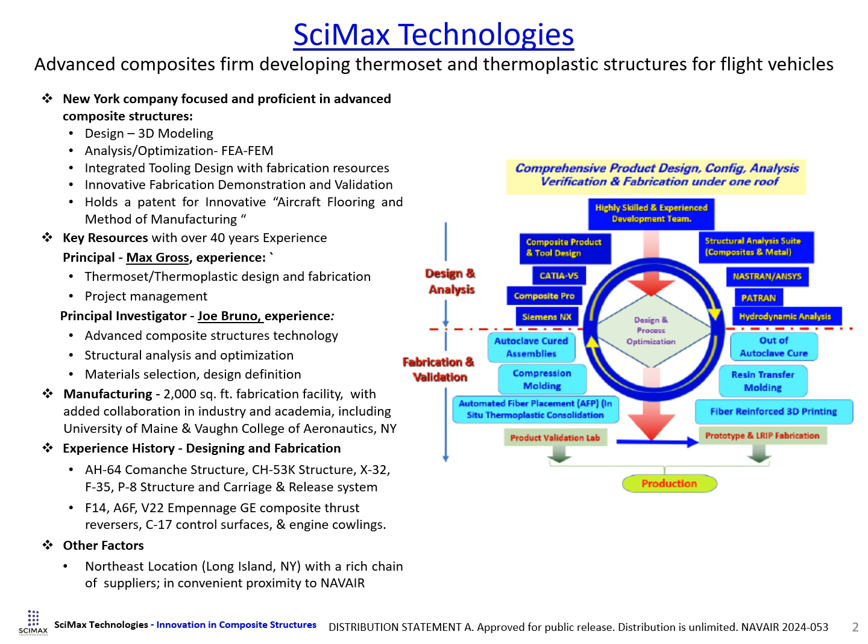A common issue in all aircraft is the performance weight challenge. Therefore, the goal set out by our design team was to bring weight down in order to attain improved aircraft performance. This results in increased payload and longer range while maintaining or improving integrity and durability.

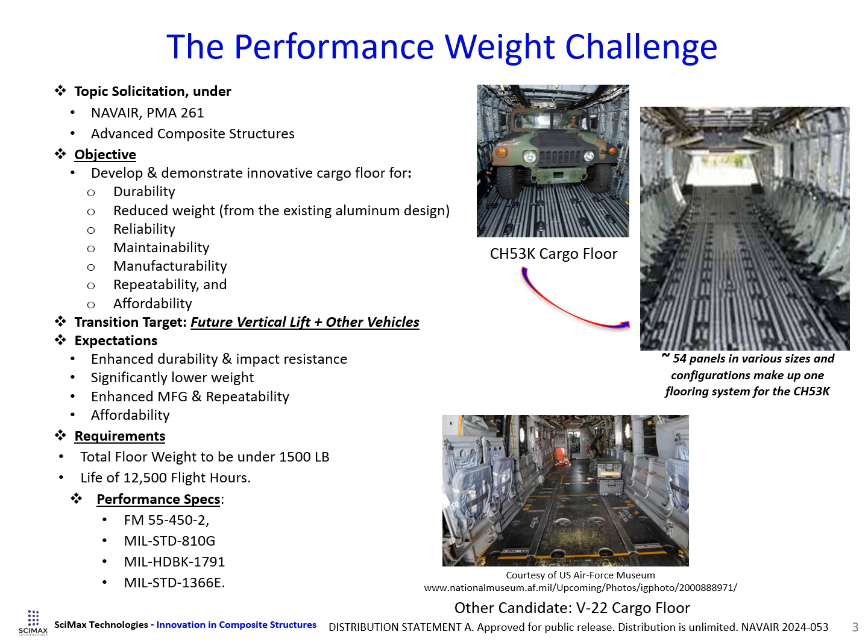The lightweight flooring system development was part of the NAVAIR contract under PMA 261 to obtain a lighter and more robust flooring system for the Navy and Marines. The goal of the program is to create a flooring system for the CH-53K under 1,500 pounds while meeting all performance specs. The programs were initiated in a building block approach.

First, material selection was conducted via analysis and coupon level validation testing to select the best material. The preferred material selected is a polyether ether ketone resin with an AS4 carbon tape, known as AS4 PEEK. This material has excellent impact resistance characteristics over other thermoset and thermoplastic systems.

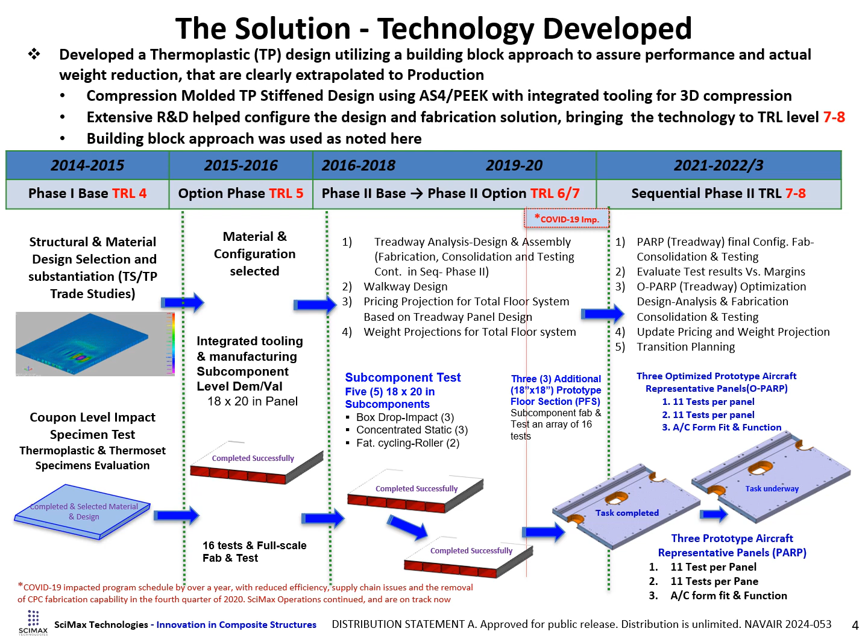Once these phases were completed successfully, the program moved on to the design of full-scale prototype aircraft representative panels, or PARP. Further optimization was undertaken to further reduce flooring weight with the optimized PARP design, known as OPARP.

Design and analysis of the PFS panels concentrated on ply stack-up symmetry and ply orientations to meet loading path requirements in a quasi-isotropic load path distribution, 0, plus 45, minus 45, and 90-degree orientations. FEA and FEM models were developed with static and dynamic impact loading simulation to predict panel performance under actual conditions.

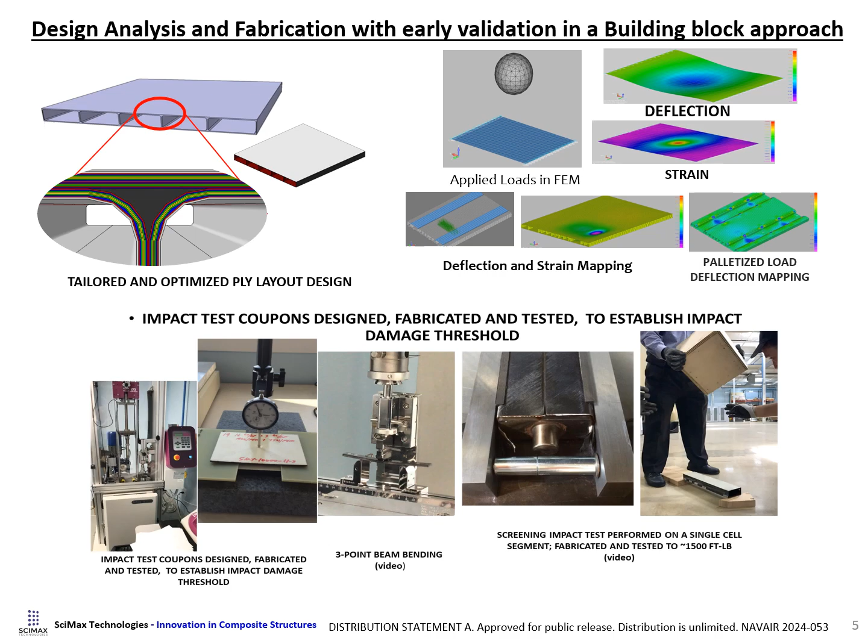The lower half of this slide, from left to right, shows 4 by 5 inch coupon impact testing, bending coupon testing, and a single cell floor section setup for impact testing. The initial coupon level testing provided the confidence to proceed with the fabrication of the aircraft PFS panels. The fabricated aircraft PFS panels were subjected to static, durability, and impact testing by NAVAIR.

Static loading testing was conducted by applying hydraulic pressure on a 10-inch steel disc placed on the panel. Pressure was increased until reaching 2,000 pounds, or 25 psi. After reaching the 2,000-pound load, with no measurable bending or deflection, the load was slowly increased up to 115 psi without any sign of failure, except for about a 1/4 inch deflection of the panel between the support rails. Failure did occur when the loading reached 128 psi.

It should be noted that although static load is not the design driver, the large margin above the 25 psi specification was expected as part of the critical design to meet the impact loading tests.

Durability testing was performed with a 2.5-inch wide, 4-inch diameter steel roller, rolling over the panel from edge to edge under a load of 1,000 pounds for 1,000 full cycles. It should be noted that the load concentration on the panel is only the wheel contact surface as it is rolling over it. The contact surface is estimated to be only 1/10 of an inch wide over the 2.5-inch wide steel roller. This translates to a dynamic load of about 4,000 psi. The tests were successful with only minor scratching of the panel surface along the wheel edges.

The impact testing was the most severe test, which used a 200-pound wooden box with a corner blunted to a 1/2-inch radius and dropped from a 15-inch height above the panel.

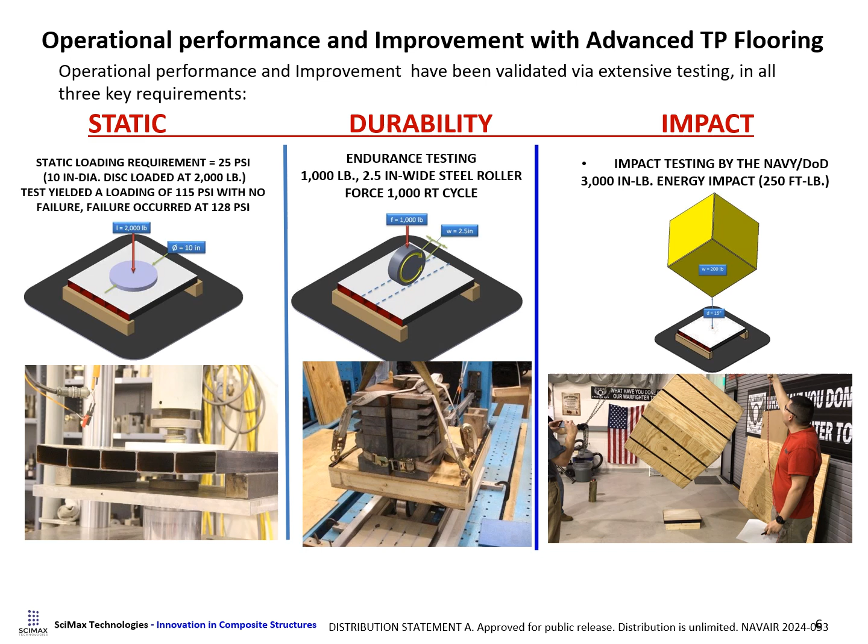This yielded a 250 foot-pound, or 3,000 inch-pound impact on the panel. All impact tests met the minimum damage criteria of limited local delamination with an indentation into the panel no greater than 0.3 inches deep. Utilizing thermoplastic carbon flooring will yield a 350-pound weight savings per aircraft compared to the current machined aluminum flooring system on the CH-53K.

Our most recent SBIR contract came to a close at the end of 2023 with a mature design and fabrication methodology. The TRL level at this stage of the development is in the 7 to 8 range. SciMax has continued further with its own research and development to optimize the thermoplastic fabrication process. This new process will lead to improved accuracy by using internal heated air pressure in an encapsulated hard tooling, thereby eliminating the need for the expensive platen press.

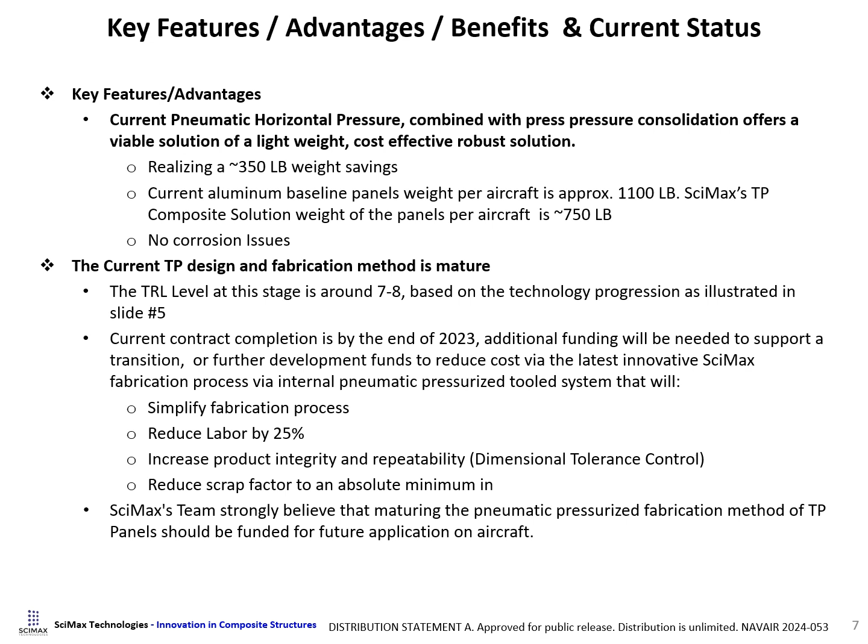This will simplify the fabrication process, reduce recurring labor by 25%, improve and optimize integrity and repeatability of the product, reduce scrap factors, and provide a better production-ready flooring system at a reduced price. The research and development phases provided SciMax with a strong learning path on how to optimize fabrication methodology for thermoplastic flooring. This can be summed up in 4 major steps.

While the autoclave process was successful, it proved to be expensive with sizable reworks due to difficulty in high-temperature bagging, which could lead to a high scrap factor. Additionally, this required an expensive high-temperature and high-pressure autoclave, rated at 800 degrees Fahrenheit and 300 psi.

SciMax next transitioned to a heated high-pressure and high-temperature platen press concept. The press provided the vertical forces coupled with a spring-loaded bolted sliding rail system for the lateral pressure, providing 3-dimensional heated consolidation pressure. This system worked well. However, the spring loading was sensitive to the accuracy of torque values of the spring-loaded bolts, and monitoring torque values was limited during the consolidation.

In the third stage, the mechanical lateral loading system was replaced by an optimized pneumatic piston that pushed the sliding tooling rail against the panel, with very good results. All the PARP and OPARP panels were produced using this method, which also had shortcomings. Adjustments would be needed when moving from press to press to achieve good parallelism between the upper and lower platens of the press. The ideal tolerance of plus or minus 0.005 inches on a big moving press assembly is a challenging task, and a good close tolerance high pressure and temperature press is expensive. Therefore, further enhancement is needed to achieve production level repeatability, lowering fabrication cost.

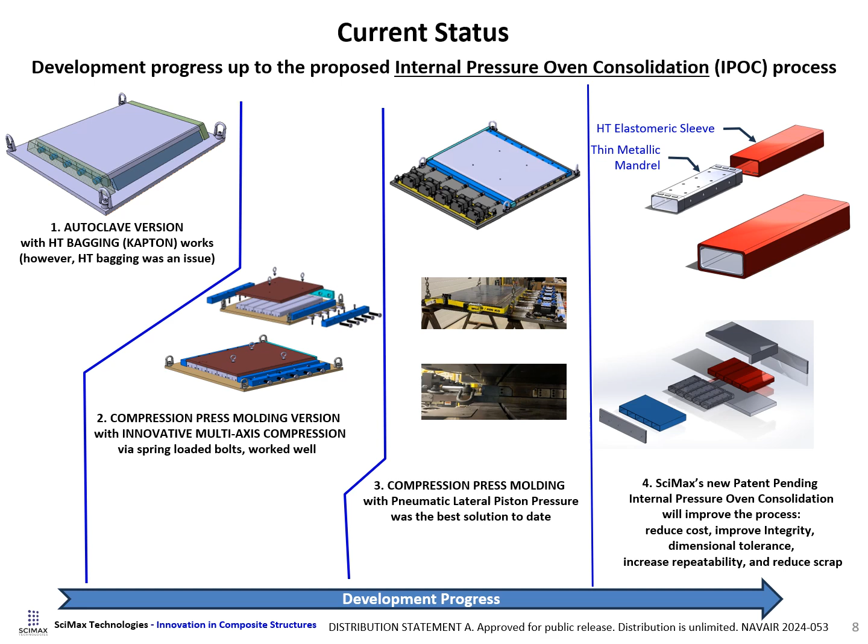The system operates in a high-temperature oven, with heat and pressure applied per consolidation specifications, and monitored throughout the consolidation cycle. The resulting fabricated panels are matched die fabrication, with accurate net dimensions that are so critical to aircraft cargo flooring. Transition to fleet will require a final validation of the IPOC fabrication process. The estimated budget to validate the IPOC process would be less than $1 million.

A notional program spanning approximately 12 months would include a robust feasibility study via fabrication of about 6 to 10 panels, followed by validation testing to assure that the updated process meets all the performance specs. The IPOC process would meet the weight reduction for the PARP and OPARP and demonstrate optimum cost reductions. The predicted production cost using IPOC would be in line with typical composite structure cost for aircraft in dollars per pound, and most likely even lower, with elimination of expensive machinery and reduced labor hours.

This will be a marketable product for multiple vertical lift platforms, including the V280, CH-53K, and any retrofit for current in-service cargo aircraft and helicopters, such as the C-130, C-17, and CH-46 derivative, among others. While the current configuration is based on the CH-53K, transition to a fleet program on other platforms would require significantly minimal effort, with just an initial configuration adaptation and validation to the aircraft.

Production of the flooring panels with the IPOC process will require a much lower capital investment for the fabrication shop. No expensive equipment will be needed, with only basic machinery required, such as an automated ply cutter, 2 medium-sized 800-degree rated ovens for redundancy, and a basic cleanroom, all fitting in a facility of about 2,000 to 2,500 square feet.

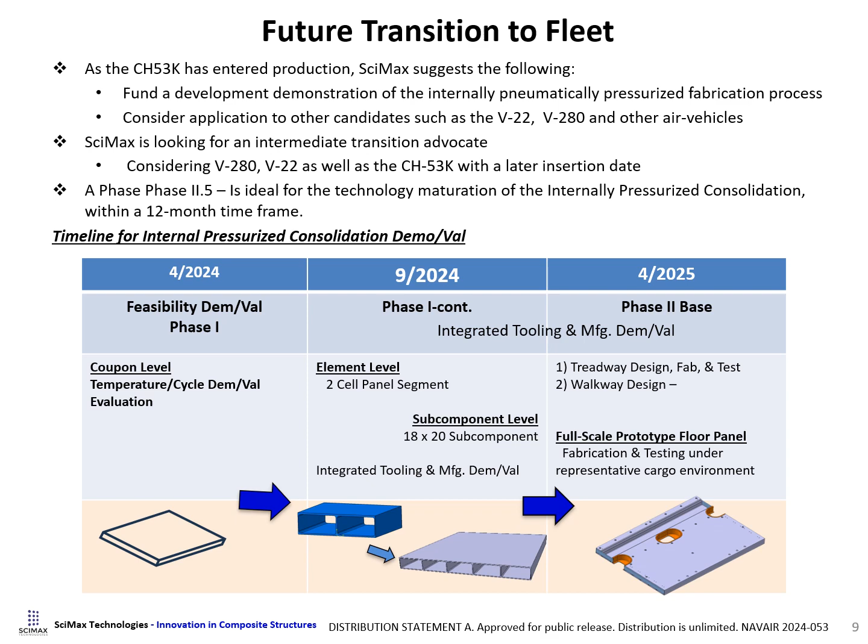Market analysis indicates that once SciMax sets up a thermoplastic fabrication facility with the IPC philosophy, SciMax Engineering can provide multiple DoD programs and commercial aircraft structural components susceptible to high impact. These include areas of flight safety concern, such as leading edges of wings, horizontal and vertical stabilizers, jet engine inlets, fuselage lower surfaces for aircraft taking off and landing from unimproved runways, and more. We invite you to consider the IPC design for your impact resistance requirements.